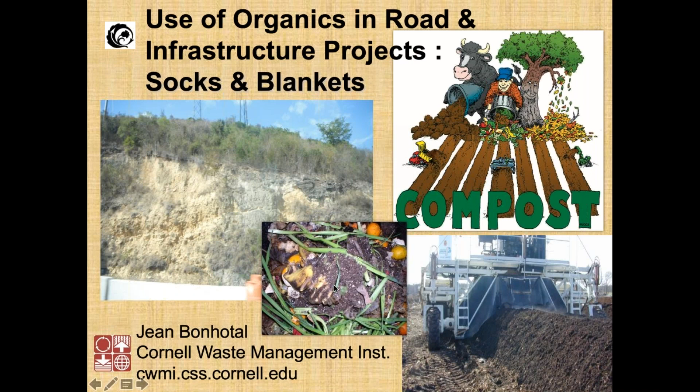Take it away. Do I have the slides? Can everybody see the slides? I can see your slides, Jean. So go ahead. They look good. So I just go ahead. Thank you. Okay. Just advance them as normal. Will do. Thanks, everybody. Sorry for the technical difficulties. I'm on the road, but there's always technical difficulties. Okay. I'm not advancing, so if somebody can advance. Jean, this is Terry. Your cursor has to be on the slide to advance, and there's often a slight delay when you first start advancing. I've got it. I've never done it that way. Thank you.

Okay, so for the next hour or so, we're going to talk about using compost in a lot of different ways. We use it to build soils, to reduce erosion, to improve soil moisture retention. It's important, and we'll go through some of these things. I don't need to read this to you right now, but we'll look at the natural cycles.

We'll look at best management practices, using socks and blankets, how we can find good organic matter quality and what quality matters where, because we can use different quality materials in different situations and different types of materials in different situations.

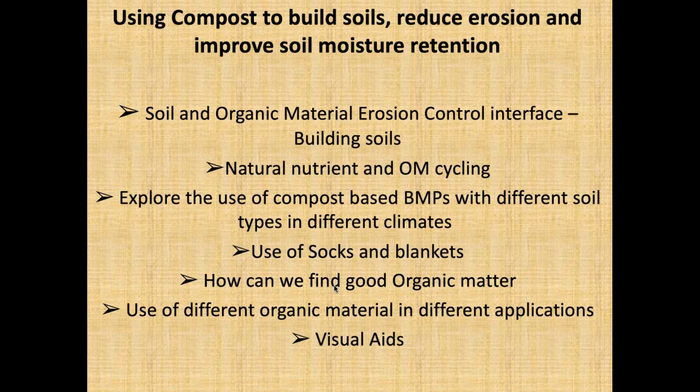There we go. So the effects of erosion, I think people know these pretty well. We see them in our everyday lives. These are not pictures from the U.S. These are pictures from other places, but we have plenty of these. And that top left corner is off of Puerto Rico at the mouth of a river where all the soil has just simply washed out into the ocean. It was an amazing picture, so I just had to capture it and use that for some of the erosion. The steep slopes, all that, we need to work with that kind of stuff.

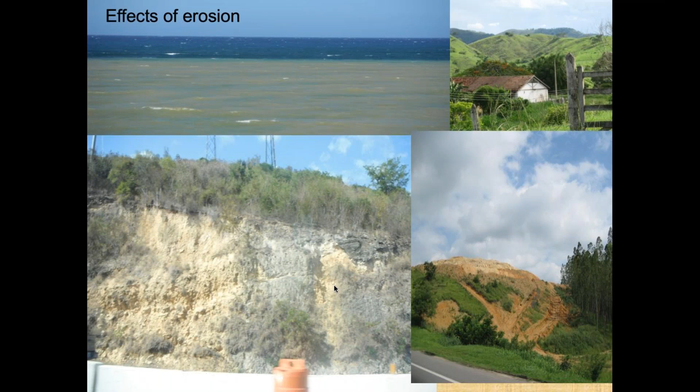More erosion. This is in a ski resort where they were expanding areas. I just took these last summer. We were expanding areas, and there were no erosion control berms, blankets, socks. There was just nothing to keep the silt from going down into, in this case, the Rio Grande. Ultimately, it was going to get to the Rio Grande.

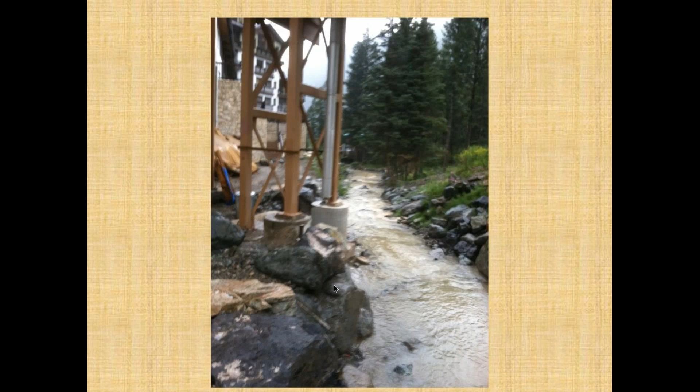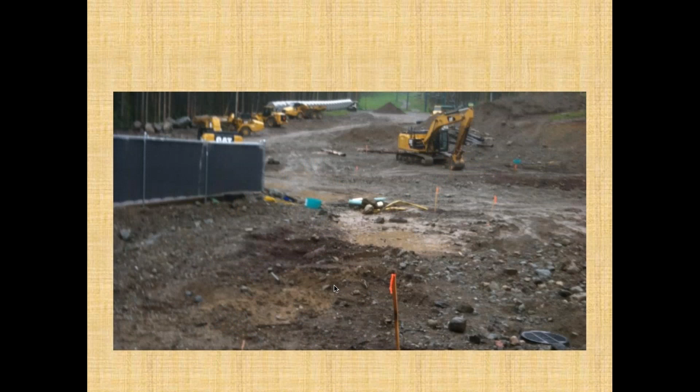And you can see where the buildings are and where all the sand, all the soil is washing out. And I'll just go through a few more. Nothing to stop things from moving, no fencing, which doesn't always work that well either, but just nothing to keep that soil in place, and it was just moving.

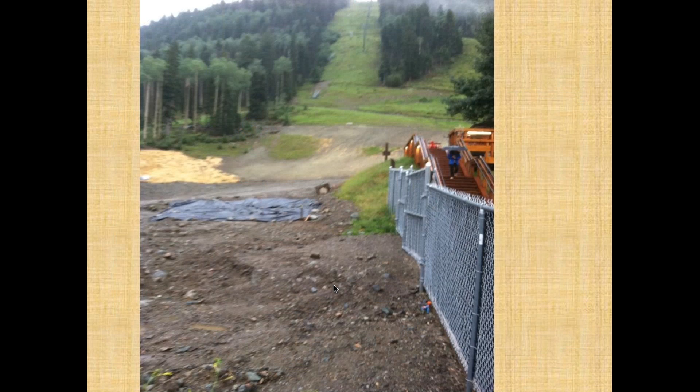As you can see, some of this is just that ski area, and I just took advantage of the good pictures, or the good negative example of what was being done. There is some straw that was laid down to grow some grass, but that's on a relatively flat area off to the side. And this was the Rio Grande.

And people were rafting in this, which was interesting. I put my foot in there and I pulled it out very quickly because there were a lot of things alive in it. But that was the Rio Grande.

So why? One of the reasons why we want to be doing this. So organic material. Why use organic material versus fences versus hay bales versus lighter materials, straw and things like that? Moisture holding capacity is tremendous.

And I'll digress just slightly, but with the hotter and the colder climates that we're experiencing, and experiencing more droughts, even on roadsides, on lawns, in field crops, if we can increase the organic material in our soils, we will be able to help that situation. We'll be able to keep the moisture in those soils that we so desperately need at certain times, especially when we're going through some of the extremes that we deal with.

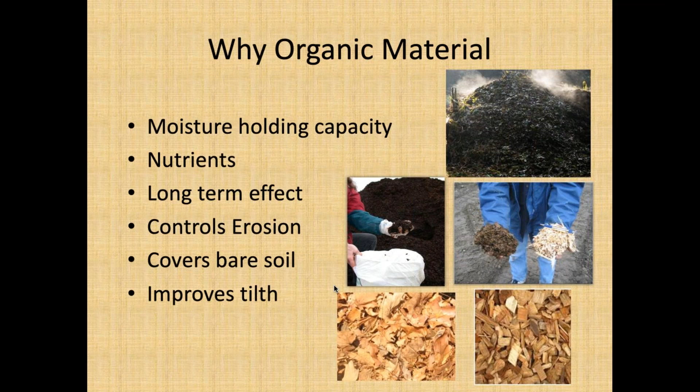It covers bare soil. Bare soil should always be covered either with vegetation or with organic matter. And it improves tilth. It adds to the nutrients. It adds that whole microbiome. It improves the microbiome of the soil, and it helps with disease issues, with pest problems, with all of that, because there's just more competition there.

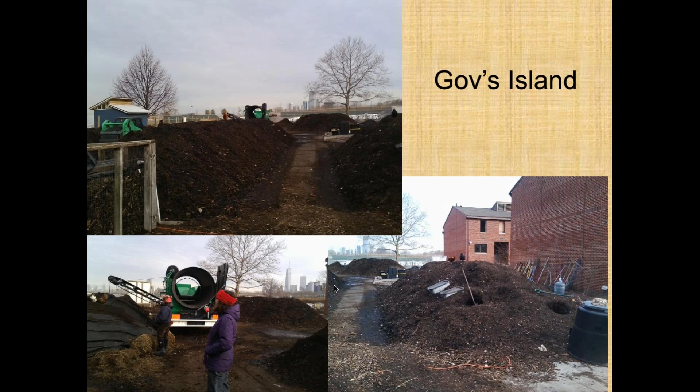We need to know what the compost is. When we're choosing different composts, we need to know what we're choosing. And so knowing what the analysis is of that compost is helpful so that we are in the right target ranges for using some of these. And this is just an example of what's the organic matter in this, what's the moisture content, what's the nitrogen, all of those kinds of things.

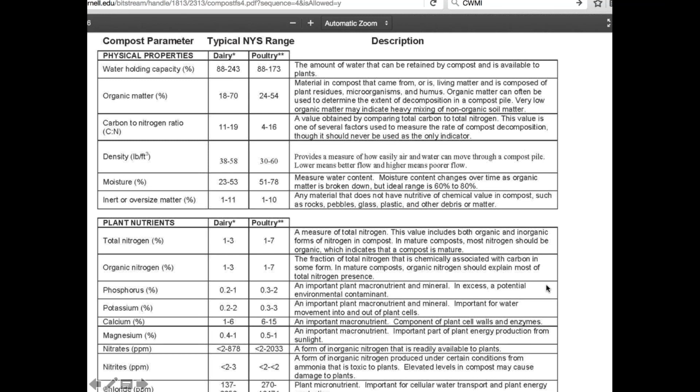So there's a lot of different things that are looked for, and we don't generally expect people to look for all of these analytes, because it would be very expensive. So we tend to do a lot of testing and look at the feedstocks to see what that compost is going to look like. We have a database on Cornell Waste Management Institute's website so that you can compare and see what the analysis should be for those different feedstocks.

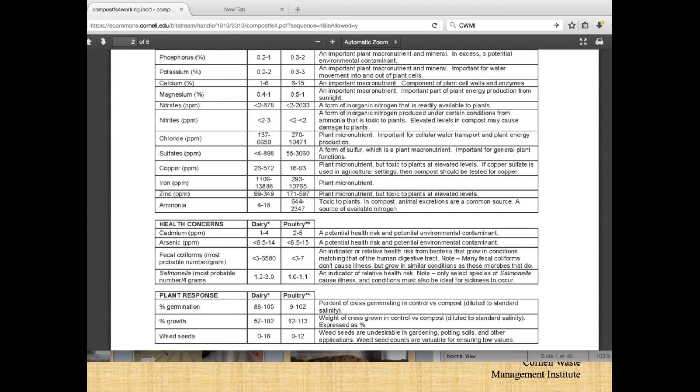And we should always know the crop requirement or the soil requirement. And on roadsides and ditches and things like that, we want really low nutrients. That's why I was talking about the low nutrient composts or low nutrient medium that we might use in a sock or use as part of a blanket.

Organic material. Can you have too much organic material? Yeah, we can use too much organic material. It's pretty hard to put too much on slopes, roadsides, crops, all that kind of stuff. But we have seen situations where we are turning into something more like a bog than the soils that we would like to see.

pH is important depending on what we're growing, so know what that specific crop needs. If we're growing grapes, grass, wildflowers, pollinator species, things like that, we want to have a good idea of what we're using. Okay. So I'm going to go through some different composts just so we have an idea of what we're looking at.

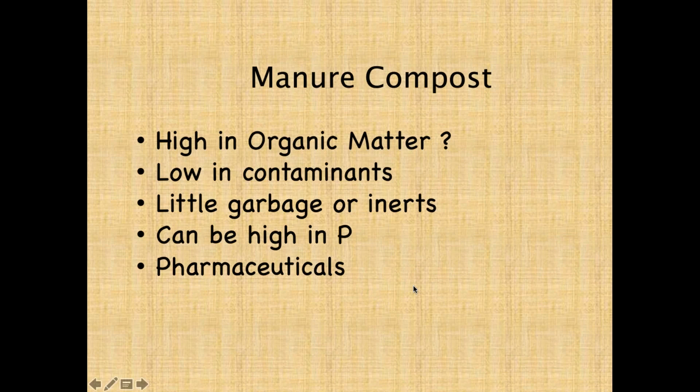They can be high in phosphorus, so we have to think about that. If we're on a flat area, that's fine. But if we're on a sloped area and we have high phosphorus, some of that phosphorus is going to run over land. And for the pharmaceuticals, they're generally low in pharmaceuticals.

In New York State and in the U.S., in New York State, I'll talk about that. We have a lot of compost facilities that have wood chips and compost and leaf mulch and different products that are available. In New York, we've mapped all of ours so that it's easy for people to find them.

Some of the materials are coming from colleges and universities, farms, prisons, DOTs, Departments of Corrections. So different people are making different materials. Municipalities are probably our largest, and there are a lot of municipalities that are making compost.

On the U.S. Compost Council website, there's a version of this called Find a Composter, and they will have all of those types of materials as well in case people need to find places. But it's something that you don't want to move great distances unless you need something very, very specific, like, okay, I need a poultry manure compost for this specific reason, and then we'll do that.

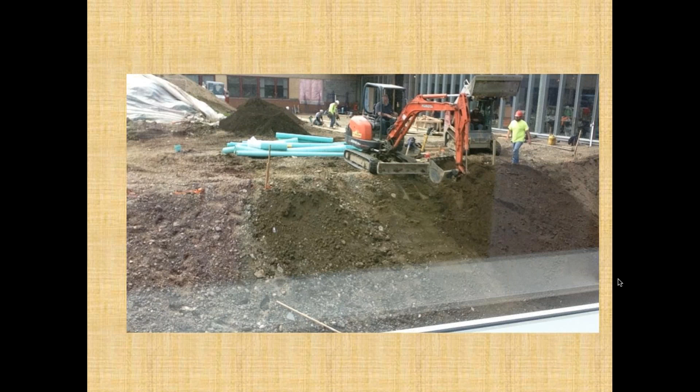So I'm going to go through a whole lot of examples of places that compost is being used. This is going to be a place where it's been done wrong. I'm using this example because it was just such a good wrong example that we had to document it. These slides are taken through glass, so there is a little bit of reflection. So I'll apologize for that, but that was the only way to get those shots.

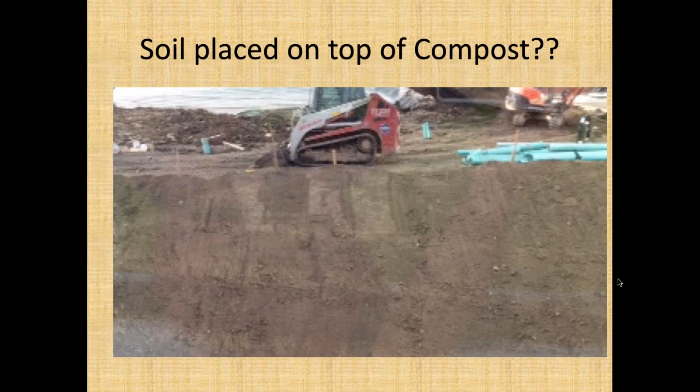This is in an atrium area, and a firm was brought in to put this together. They knew what they were doing, supposedly. But what ended up happening was they went in there to reshape this atrium area, and they scraped down, took some of the topsoil off, and then put a layer of compost down, and then they put topsoil on top of that.

And what they needed to do was to just put the compost down on the soil and then plant into it. If they needed to do some agitation, some tilling, some other things to mix that compost in, they could have. But in this situation, that wasn't something they needed to do.

So as you can see, what happens when water drops on soil is that water wets the soil, and it makes it into a mud, and then that mud starts flowing. And that's what happened here. And if you remember my description of why the compost blankets stay in place, the compost blanket absorbs those water droplets, and it has cushion, so it just absorbs like that sponge, and doesn't pick it up and let it run away.

In this case, that topsoil that was put on top of that layer, it was sandwiched incorrectly, and the topsoil that was put on top just allowed everything to run right down and have to be re-landscaped.

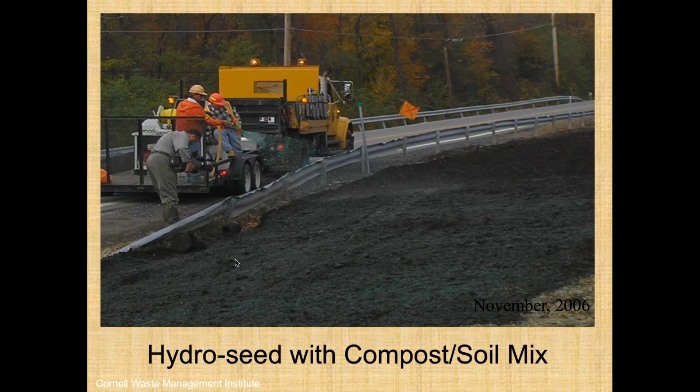I feared that we would winter kill the grass seed, but we ended up with grass very, very well, and this ended up being a beautiful demonstration. So Jean, why did you think it wasn't going to work? Because 3 inches of compost is a lot of compost. That's a really thick blanket. Okay.

We did a lot of testing with grass, not establishing grass, but with top dressing grass, especially playing fields and parks and things like that. And in those, we did 1/2 inch, 1/4 inch. We could have put a full inch on, but at some point you're going to smother the grass that's there. And I worry about the volatile organic acids just being too much, because the grass seed does want some soil. And the soil is down below the compost. It's not mixed into the compost. Okay, great. So that's why I was nervous about the 3 inches.

Yeah, okay. So somebody else asked, how much extra does it cost to apply compost on roadway shoulders? You're bringing other things out anyway. So this one, as I said, was roadkill compost, so there were some bones in it. You can see some stuff where there might be some bones showing through there. In this one, we really can't. But in that one, after it rained, we could see some bones showing through.

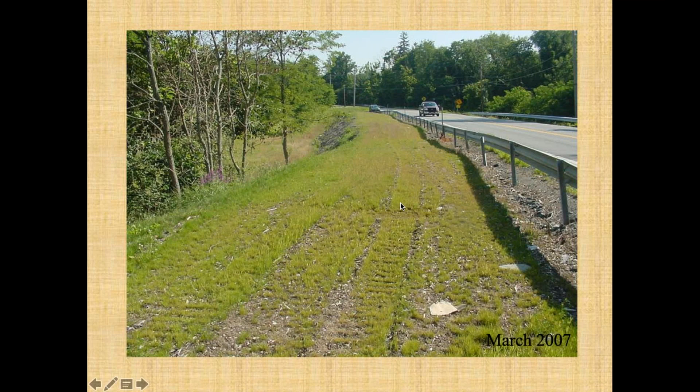You're advancing the slide. I'm trying. Oh, okay. I thought you were talking to me. Hold on. No, it just wasn't going. So let me try. There. Okay. Let me move. Can you guys see the panel in there? You're not seeing the panel. Good. Okay. Yeah.

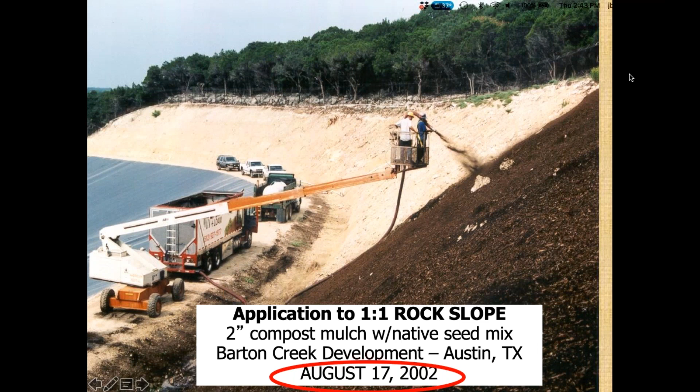This is not advancing consistently, so sorry.

I think everybody working on roadsides would agree with me that our goal is not to grow a lot of vegetation and to block the roadsides. We just want to hold our slopes, and having good vegetative plants and interseeding, like this slope is not going to be mowed, interseeding with the wildflower mixes and things like that that are native to Texas is really helpful.

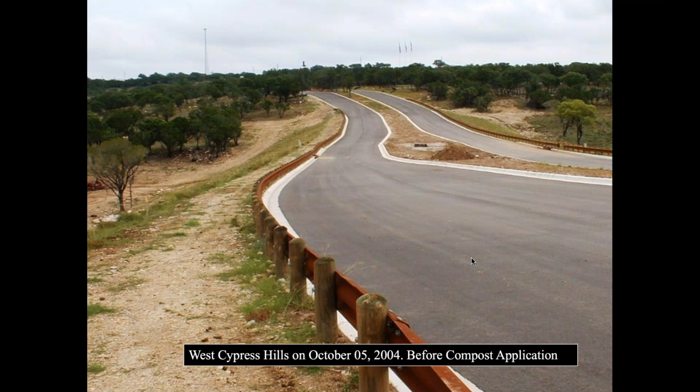So the roadsides, as I said, nothing was there. They were having a lot of problems. This is a picture without compost, and that's after they applied and seeded. They did use some fencing in here to keep things in order, but they put down compost blankets there. And they're looking at an inch to 2 inches of compost that they can put down on those roadsides.

And that compost ends up working its way down, the organic matter into the soil, and creates those blankets that we need. If there's no food in the soil, the earthworms can't do very much, and the organic matter, and the microbes that live on the organic matter, is really what they're looking for. So they can really till our soils for us and do a lot of incorporation of that material in these soil systems.

This was a dump. I'm sure everybody has these situations municipally, but this was a dump that was on Route 87, the Northway, in New York State, and they decided that they needed to restore it. It's actually in the median of the roads. It has almost no access to anyone, but they pulled the garbage out of there.

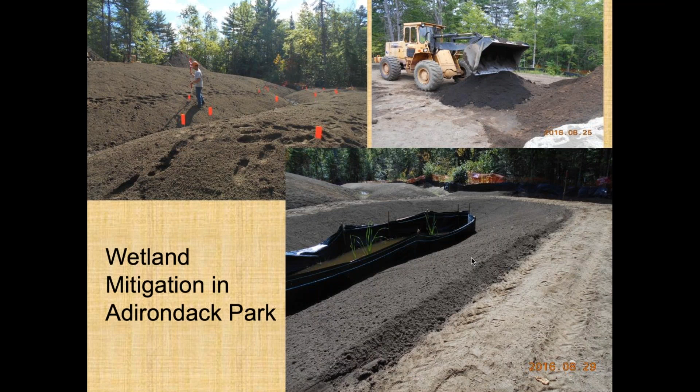The poultry manure does a great job growing our vegetables, but it would not do a great job in this type of a soil system. So it's what we wouldn't want to do there. But this, I've never actually seen this. Somebody took the pictures for me because you can't access this one. I just advised some of the stuff, but this is what that area looks like, or not now, but 2 years ago. And the bog plants are starting to come in, and everything is in much better shape.

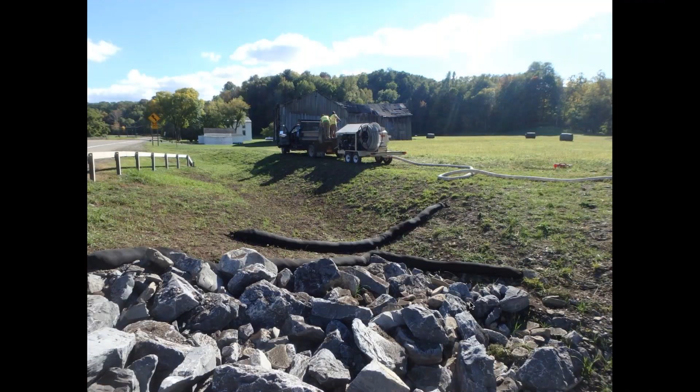So this has a lot of riprap to slow, and the water will be in front of that. And then in front of that, after we put the blanket down, seeded that, then we put the socks in there so that we would be able to filter anything that was coming down in that little depression.

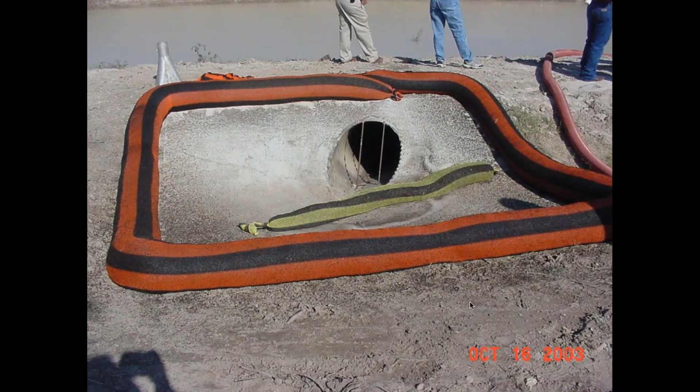Really important to put some kind of protection around our water system so that all the soil and particulate matter doesn't end up in our sewage treatment systems, because that's not really helpful. It clogs things, and it's better to keep things flowing better. So we use the socks to ring those and keep things out.

And you'll see a bunch more of these pictures where construction's being done. We needed to put in some good socks. There was a drainage area that was going out of there that will eventually be seeded, but while the construction was going on, wouldn't be seeded. And these socks were put in place so that they could retain some of that sediment behind, and the sediment will build up behind. These socks in particular would be removed, but some socks we don't really need to remove, and as we go through I'll show you some of the situations where I wouldn't bother removing the socks until and unless the ditch needed to be scooped out again.

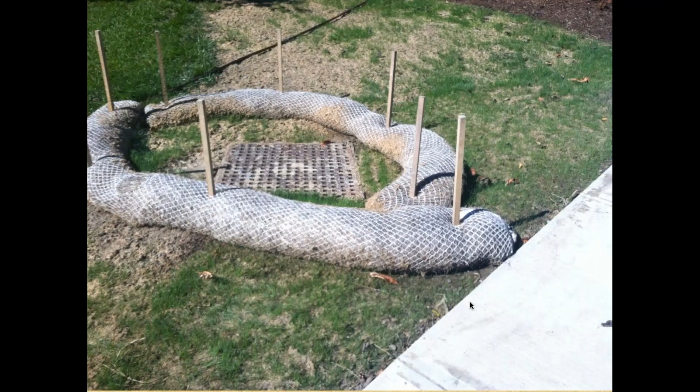Again, protect those drainage areas so that seed and everything else isn't getting down in there, and the particulate matter is not getting in there. But most of these things we see us doing, we do anyway. But I did take this picture because I had somebody that was applying compost, and they put the pile of compost right by the drain because then they would be able to wash it away after they took the majority of it away.

And I said, no, no, no. We can't do that because we don't want to get that particulate matter into the sewage systems or into the water systems because it just clogs things up and we've got to go down there and dig them out more often. So it was something that I had experienced that I thought, oh, we should pass that on.

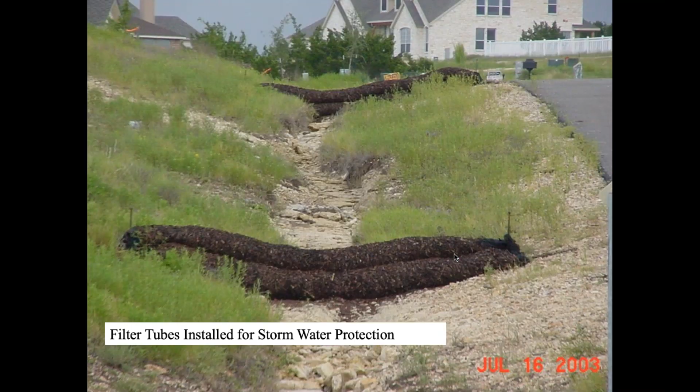One of the things that we did years ago was a survey at one of the Northeast shows of landscapers and DOTs and people that would be planting trees. And one of the things that they told us was that we don't want the compost in bulk. We want a 20 to 30 pound bag of compost, because when we're putting 100 trees in, we're going to drop a tree and drop a bag of compost, and then we can just keep moving right through the system.

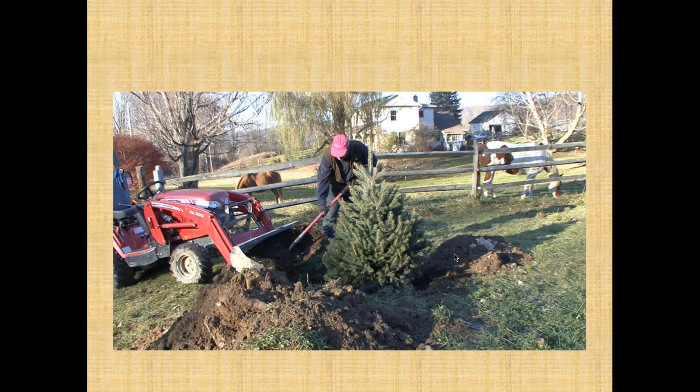Another, planting a tree. Landscaping. So anybody that has been on the Cornell campus, all of our landscaping pretty much happens this way. It becomes a class project, and the landscaping groups actually take it on. The teacher takes it on, and they figure these things out. And this one is smallish gardens behind.

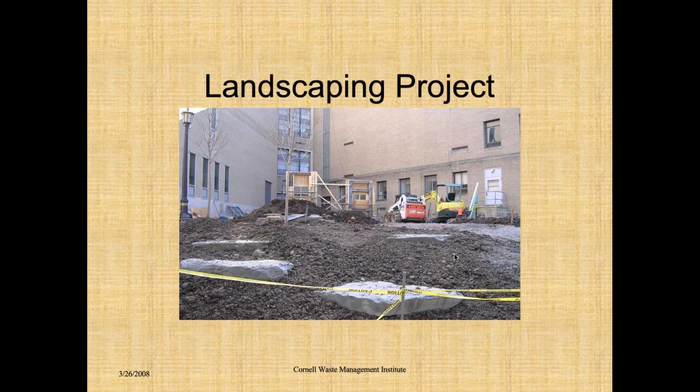And as we know, when we're working against buildings, a lot of times garbage is put back in as fill. So it might be crumbs of rock and concrete and all kinds of stuff. And the compaction around buildings is tremendous. So what was done with this was the soil was actually taken out and then mixed 50-50 with composts.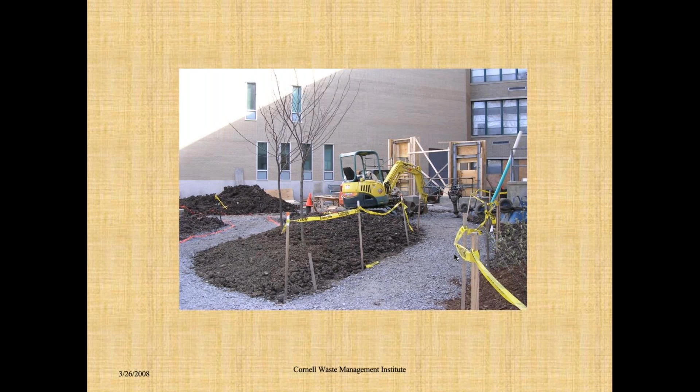And in this particular case, we were doing research on dairy and poultry, to see if there were differences in the dairy and poultry composts being used here. And they both looked really good. So we didn't have a problem with either, but we put 50% soil, 50% compost in those situations, and the gardens propagated tremendously. It was a really nice showing. And these gardens, this is 10 years ago, I think. So these gardens are good.

And the other thing about the way that the compost was incorporated here, when we're putting in gardens and city plantings and things like that, we are still getting a positive organic matter result from this. We don't have to add anything at all. So we're getting good nutrient transfer. It has created a sustainable system for the plants that are here. So that's a really nice thing to be able to say: I don't have to do a lot of weeding. I don't have to do a lot of work. I've got what I need here, and my plants are growing.

This is a Homer compost facility, and they put in a garden alongside their compost just to show people how it works, and it certainly does.

So this is a compost blanket that's going in, and it's over a stream. It's about 15 feet down to the stream, and both sides of the road were cleared of vegetation. So they went in and they just took everything out. And this was about early October that happened. Trees, everything. And this is a very protected stream underneath, a very clear trout stream. It needs to be protected. So we went in and we started working on covering the bare soil.

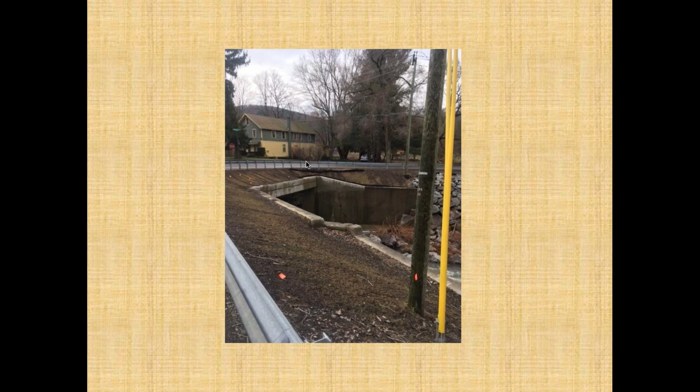So what we did was we put blanket material in here. We sprayed all that in here and then hydroseeded this portion. We also put the socks in right below the guardrail. The road is obviously right on the other side, and the road was set so that all the garbage, all the salt and the sand and everything just comes right over that bank and into that area. So we pinned the sock in there. We pinned the sock down below so we could catch anything that went under that sock, and to start working on that.

This was a little bit farther, and remember I said sometimes we need to put a little bit more application in. We had some blowouts go underneath these rails, underneath the socks, and really just create a rivulet. There were only two, and that was a long stretch of highway, but anyway, we went back in and we put more in the spring so that we could fill those and get that vegetation established.

As we're going, sorry, that broke up. You can see we've even hydroseeded over the sock, because the grass will grow right out of it, and it creates even a better system. And then we have all of the grass starting to establish, and then we just worked on those rivulets.

But we have the lower sock here right above that wall that has caught. You can see there's more material right behind that sock. So that's really filled that in there, and the vegetation will take over and do the rest, so that we won't have any more soil going into the stream.

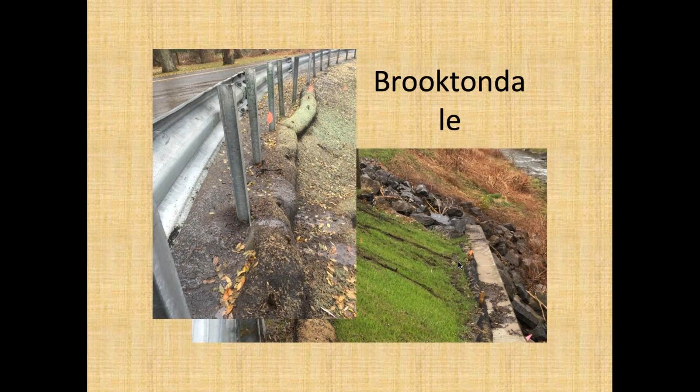In these situations, I would not remove the socks in that one, because number one, that's a precarious place and it would be hard to get it out. And this one will be helpful to keep all of the riprap, all the garbage that comes off the roads, oil, gasoline, anything that washes off, keep that up right on the roadside and not down into the stream. This is what it looks like.

That was about 8 months afterwards. And soil and water put in a beautiful red clover mix in here. I don't have a good picture of that, but it is just gorgeous. And everything's low growing, so we don't have problems with visibility, but we did both sides of the road here.

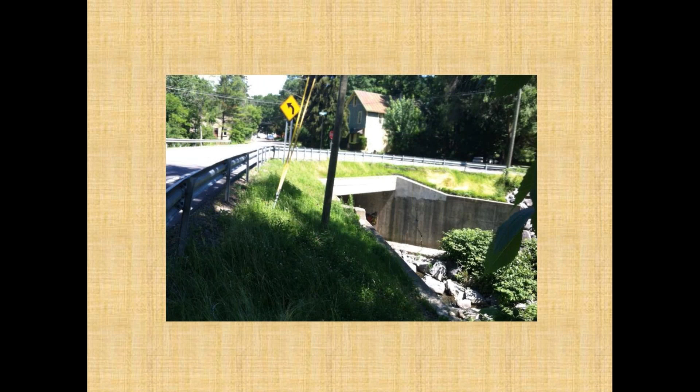This is a culvert where the landowner swore that there was never any water coming across the land here. But they had successfully grassed it in, and it is beautiful grass, but the water does flow over that. And what was happening here is it kept cutting back into the banks, just taking that lawn, and it was a vast lawn, so it wasn't that big a deal, but we still don't want the erosion, because all the stuff that's in the ditch down here is going to wash down into whatever stream or waterway.

So what we did was we shored up that side of the grass, and it goes down further as we go. We take the socks, and we did 2 layers in here, because I could see the grass roots were hanging down there, and they were getting plenty of water, so they were happy. But the grass roots were down there, so we put the socks in there to keep it from cutting back.

And then this will just be mowed. The homeowner mows that anyway, and we can use it that way. We pin these in because the water does flow in a lot of these ditches, as most people realize, every once in a while.

So, Jean, I've got a couple of sock-specific questions. I'll ask them both. Are there any socks that can decompose over time for appropriate applications? And the flip side of that, do socks need to be replaced over time? Right. So there are some degradable socks. I have not worked with any of the degradables, partly because sometimes these socks are filled and then they're left to sit, and they would start degrading too quickly, I'm afraid. But I don't have experience with them. I think they would be beneficial in a lot of places.

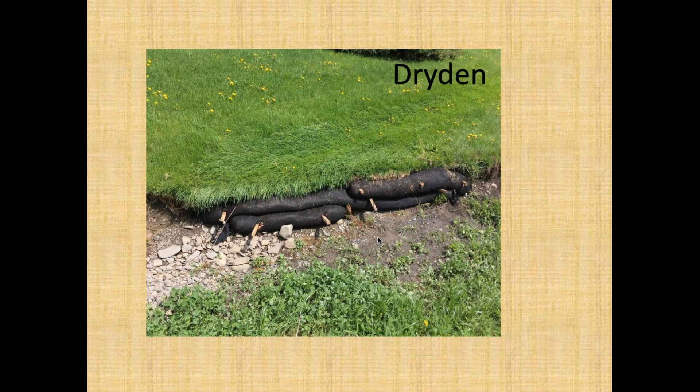This is another culvert, an undercut bank, and the water is going under the pipe right there, so the water's going under the road there. It was undercutting, so we put the socks up in there, and the rocks don't mean anything. I was just getting them out of the way. So the socks are in there. They're pinned into the bank well, and we were using 4 or 5 foot stakes, and we'd pound them in as far as we could and then cut them off.

There's water coming in here from a tile. So there's a lot of action happening here. And this was going back, and there was some kind of an electric pole up in here that we were trying to not allow the ground to lose more ground there. This was 4 months later, and that will keep filling in there. It won't be able to erode away.

And those socks, I think you can see one stake here. One stake right there. But in general, those socks will disintegrate or degrade eventually. And we really can't see that after only 4 months. So that's something that should stay in place, because when we get deluges of rain, 2-4 inch rain events, that's when those things are really tested, and those socks are going to help keep that where we want it to be.

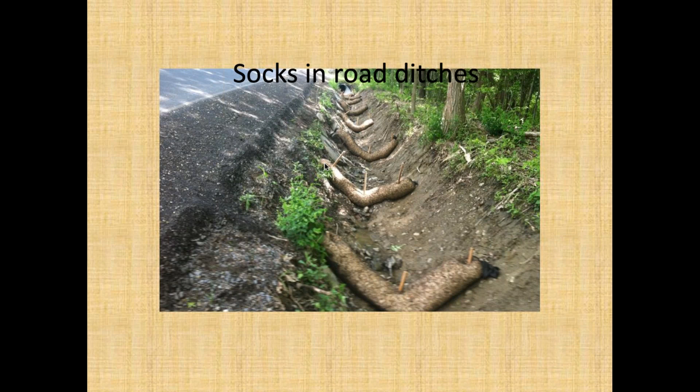We pin the socks. These have coarse wood chips in them. We pinned them in, and as I said, they're a little bit heavy, probably 40 pounds for a 6-foot sock. They will stay in place, but it's amazing how easily the water can move them if we don't pin them in place. In the next slide, you can see the sock is in place here. All of the soil has filled in behind that sock. Some of this might need to be cleared out so that we don't overrun them.

Generally they'll make some stair steps. They'll create like steps, so it slows the water down as we go down the steps. And that's what we were working on. So we have the socks in those really steep areas every 10 to 12 feet, pin those in and try to create those flat areas so that the water slows down and doesn't just take everything down and create deep pools.

There's another sock in here. You can see that's definitely holding things back. This culvert was actually going into a class 1 stream toward the bottom. It's just the way it was shaped. So this is the area that comes into the stream. It was impossible to keep the culvert going that way. The culvert decided it was going down this way. So we put an extra large sock in there,

and then we put a second sock in afterwards, because it really needed to create a dam, but we don't want it to be too much of a dam. We want the water to be able to flow through it, and that's the reason we have the large chips in there. Eventually that filter will clog up, but we'll be able to get a lot of material caught in that sock and be able to use that.

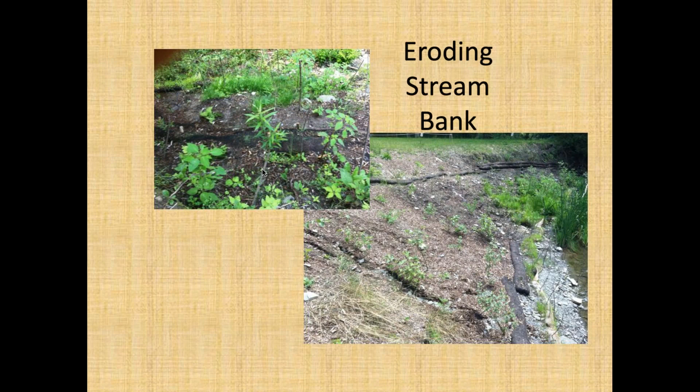And then we put in native vegetation. So the park people came in and put native vegetation. You can see we also put some native grasses in here. Those are not growing yet, but what we used in some of this is what they call quick sticks. So a willow cutting that you can just stab into the ground because there's enough moisture, and they'll root themselves. So the dogwood, the willow, a couple of other things were put in there to create that barrier to hold the soil and to hold that whole bank after a while.

There was also a drain coming off the parking lot going into that stream. This is Upper Buttermilk Falls, if anybody's familiar with it. But all the crap was coming off the parking lot, and there was a lot. So what we did was we added some compost to the sides. We put some socks in here in a couple of places, and we seeded that whole thing down so we'd have a grass swale with filters going down into that stream.